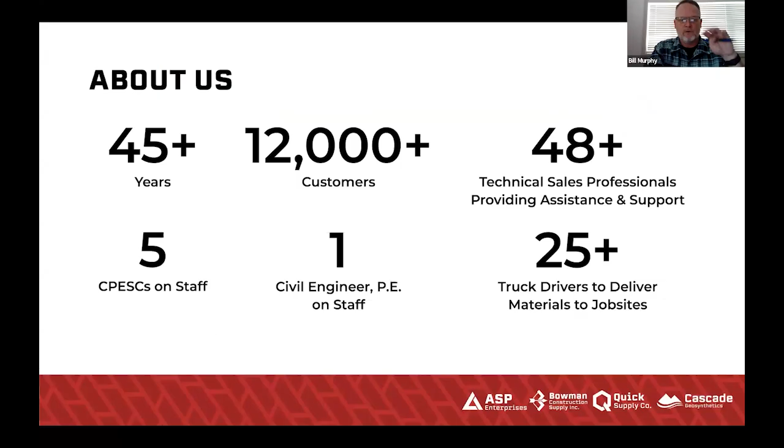This is an old slide. We do have many technical sales professionals, inside and outside sales, and we're blessed with a lot of wonderful warehouse folks and drivers. And we have one engineer, and we ride him like a rented mule - that's me. We've got offices across 12 states, but we work in adjacent states sometimes as needed to help get material where it needs to go.

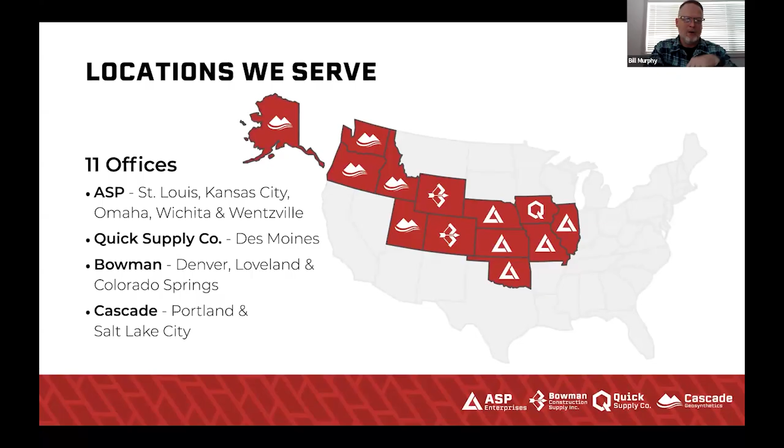For those of you familiar with this, this is all redundant. For those of you who are new to us, you may know us from our erosion control and sediment control or vegetation solutions. We're much more than that. We get involved in a variety of projects, and we're blessed with some wonderful locations.

I get to visit all of them, where we have people who are experts at making things fit inside, outside, and strategically and surgically delivering what you need when you need it. This really matters on some of those big city jobs or tight space jobs where they can't take semi loads of the same product over and over again to offload it. They need exactly what they need the day they need it, and we have people who are very good at that.

I'm blessed to not be part of that. We have people who are experts at logistics. So let us help you.

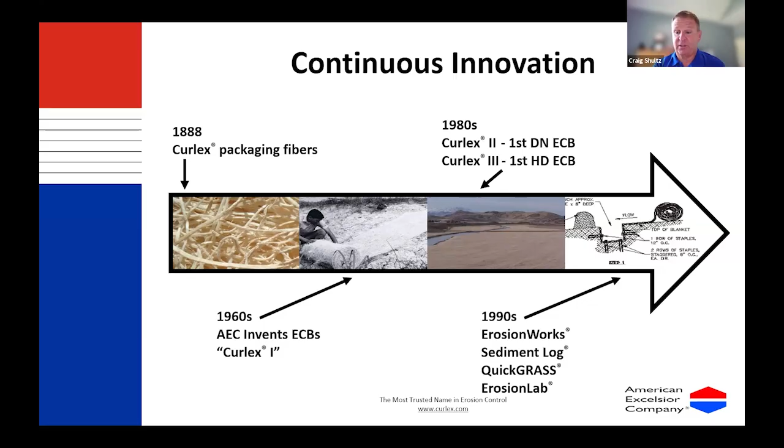In the 2000s, we introduced our Recyclex turf reinforcement mats, a synthetic turf reinforcement mat. We came out with Curlex Net Free, the first netless erosion control blanket and one of only a few on the market today. We came up with the E-Staple and Curlex Bloc. In 2018, we introduced more turf reinforcement mats, and in 2020, our most recent product was our high-vis logs.

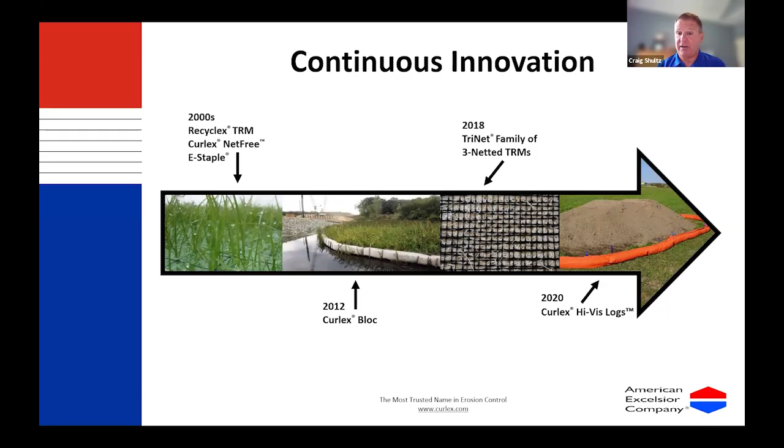That's my office, luckily enough to call my office. Though I live in Lawrence, Kansas, near Kansas City, that facility is in Rice Lake, Wisconsin. The ErosionLab is, to my knowledge, the largest testing lab of its type in North America, and perhaps the world.

At the lab, we do lots of different things, lots of testing, lots of training. We have facilities there that can do ASTM testing, which is a big deal, because without large scale testing especially, it's very hard to compare products. Even with large scale results and index, smaller scale bench results, it's not perfect, but we're trying to get there as an industry to give you, the designers and users, as much information as we can. That doesn't replace real world testing, though.

There are some other real world things, but some of the tests you may have heard of that we do there are D6459, which is rainfall, and D6460, which is channel, and we do all kinds of different things. We prefer to think of it as added value. We want to be a resource for you, your teams, our distributors, so please don't hesitate to reach out to us if we can be of assistance.

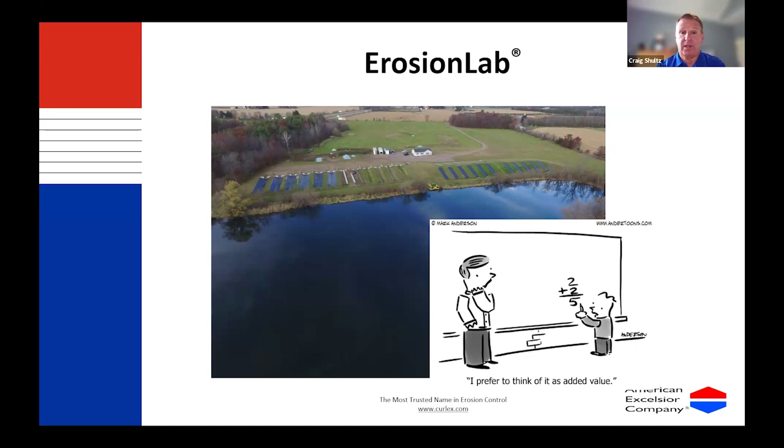I always put a couple of these pictures in so you can understand the size and scope of some of the testing. At the lab, on the left, that's D6460, the full-size version. Those are 80-foot long trapezoidal channels, and we can generate up to 80 cubic feet of water per second down those channels. It's a hugely powerful tool. D6460 in the lab world is just a vertical version of that, with a plywood channel, but it was developed from these sorts of channels, and we're proud that we were part of that many years ago.

What that tells you as a designer or engineer is shear stress, the shear stress capability of a product, whether it's a temporary erosion control product or a turf reinforcement mat. It's important that you know what shear stress means, because most people assume it has to do with when something breaks, but it actually doesn't. What it has to do with is when the test bed, the measured area, loses a half inch of soil on average over that area. The concept behind that, many years ago, was that if you lose that half inch, you're probably losing a significant amount of the seed bed. That's where that came from.

Does it mean the channel completely failed? It does not. Does it mean the material broke? It does not. It's actually not tied to tensile strength. Tensile is not correlated to shear stress.

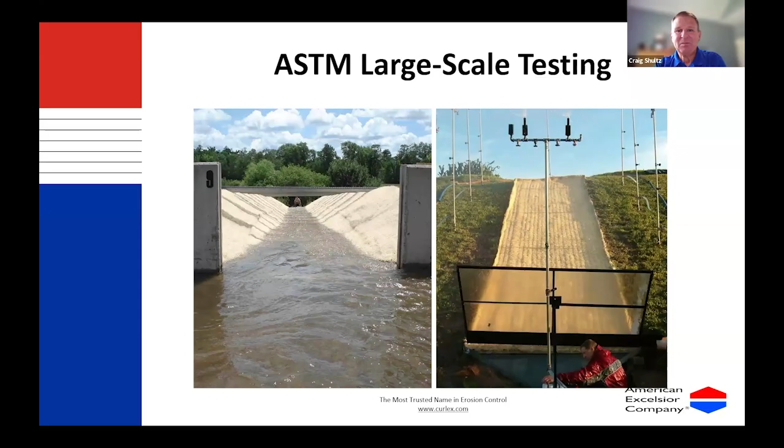I don't go into all of this today because we'd have a 5 hour call and Bill would fall asleep. No, I'm just kidding - Bill would not fall asleep. But we have a great technical support library on our website.

I really encourage you to jump out there and look for it. Please don't recreate something - if you're looking for a spec, a CAD detail, a description, an installation, a cross reference, anything, I promise you we've probably created it. Call us if you can't find it, we will help you find it. We also have a great YouTube channel - you'll see a few videos in here today talking about some things you might find interesting, how things work, some projects and things like that.

And then last, we have the ErosionWorks software that you can sign up for.

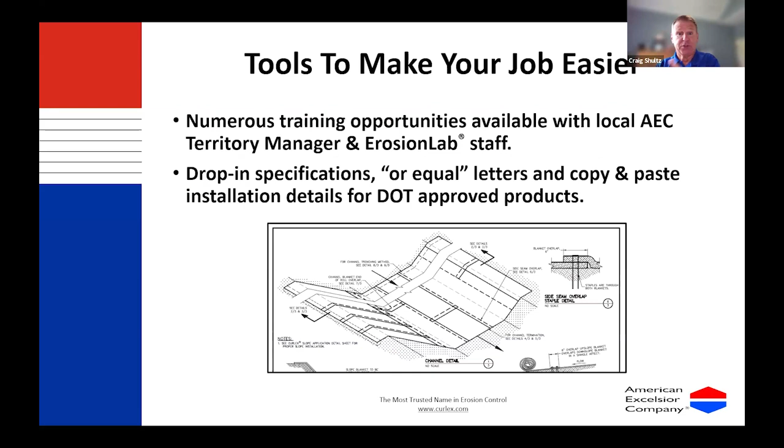Just another example - or equal letters. If you ever have a project and hear the name of a product and want to use something we have, we can tell you what would be an appropriate match, scientifically data driven to give you what you need. Let us know and we can provide that kind of information.

It's very easy to use. You don't need a whole lot of data. You can even do it from your phone. Basically, you have a material estimator.

If you're talking to a contractor or distributor, they might be able to give you some ballpark costs of how much something costs per square foot installed or otherwise. You can enter slope calculations or channel calculations, how steep, how wide, all those things. And it will give you data back out that says, based on what you wanted, an all-natural product or a turf reinforcement mat or something to last a certain number of months, this is what we recommend in a good, better, best situation. You can save a report, gives you great data to use.

Again, not hard to use, but I'm more than happy to have a personal webinar with you to show you how to use it. A nice tool to help you find those things. And also it gives you a DOT approval. So if a product's listed with a DOT, always check with us to make sure that's updated, but it is a nice tool for you.

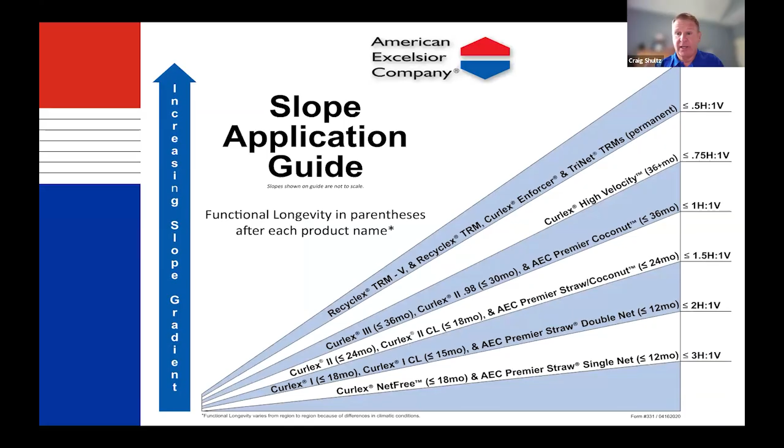Just a couple more examples, slope application guides. This is just some of the quick things people have asked us to do. I'm working on a certain kind of slope, I need something to last a certain amount of time, what should I be looking at? Do I need a turf reinforcement mat? Do I need an Excelsior product? What do I need? And similarly, this chart talks about channels.

Everything in the tannish gray are temporary blankets. These are things that give an unvegetated shear stress, and they're going to last about this long, they're going to take about this much force. And then everything in the bluish purple above are turf reinforcement mats. Those are vegetated conditions, and that's the types of forces they can withstand. So it just gives you an idea.

I think these are fantastic tools. The one before it and this one both, they're just so helpful to have a graphic representation real quick instead of reading through all the documentation for each one. But thank you for sharing these.

Sure. And like I say, all these are out there, just little things here and there to help you along the way. I want to make sure that I don't miss anything here.

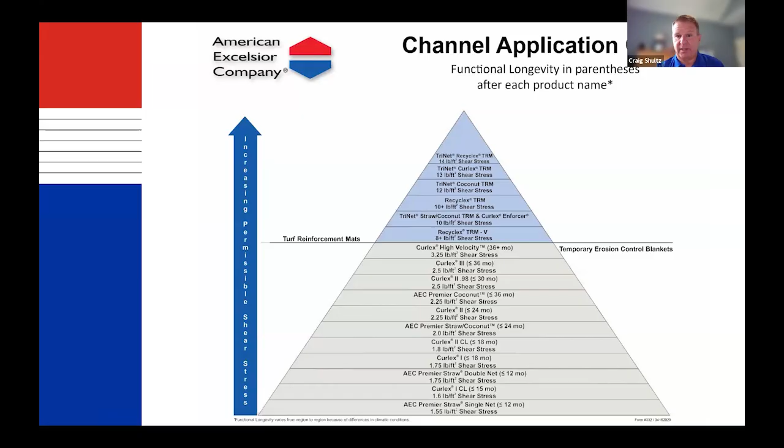So if you're on this call, I bet you know this already, but I don't like to not say it. We talk about erosion control, we talk about sediment control. Obviously erosion control is what we're doing to keep the soil in place in the first place. That's what we're trying to do, we don't want it to go anywhere. And usually in our world, that tends to be because of water. It can be wind and stuff too, of course, but water is primarily our concern.

Sediment control, on the other hand, is when that sediment is broken away from where it was. We're trying to stop it from leaving the site, entering an inlet, whatever it is, that's what we're trying to do. And as much erosion control as we can do, the less we have the need for sediment control. But in the real world, we all know that there are times on projects where there is land disturbance, and the opportunity to do erosion control is very minimal. It just doesn't exist. We have to do sediment control in certain conditions. So it's a balance, we're trying to do the right things.

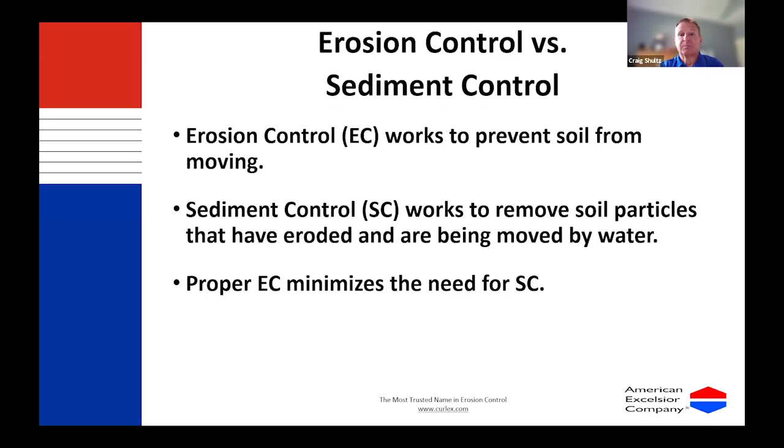Oops, I didn't click right, sorry. I'm not going to read this, but if you Google our new normal, there are hundreds, if not thousands, of facts like this that talk about what we now, and you on this call, have to design to build to, deal with in your world.

Companies like Bill's, their job is to help provide you all those different best management practices and those solutions for the events that are possible. If it fails, is it just inconvenient? Maybe. If it fails, is there concern about loss of life or danger? Well, that's a different deal. And are we designing for a 10-year event or a 100-year event?

What we see on average, and I'm sure Bill's team probably does too, the calls we get over the last few years are more erring on the side of caution than they are on the side of 'well, I don't think it'll be a problem.' The 100-year events get brought up way more than they used to be at the beginning of my career. And so we know that because of things like this, those concerns are going into protecting our environment and protecting our people.

Nobody likes this, you never have a red dollar sign. That's a good thing in any report. This was just a stat I pulled. I've had a couple people say, well, it's only $5 million in the scheme of 5 years, that's not a lot. I think $5 million is a lot of money.

What this doesn't show is all the shutdowns, right? It doesn't show all the cleanup costs. It doesn't show all the penalties, all those other things that weren't fined by the EPA. And as you all probably know, that can be significant.

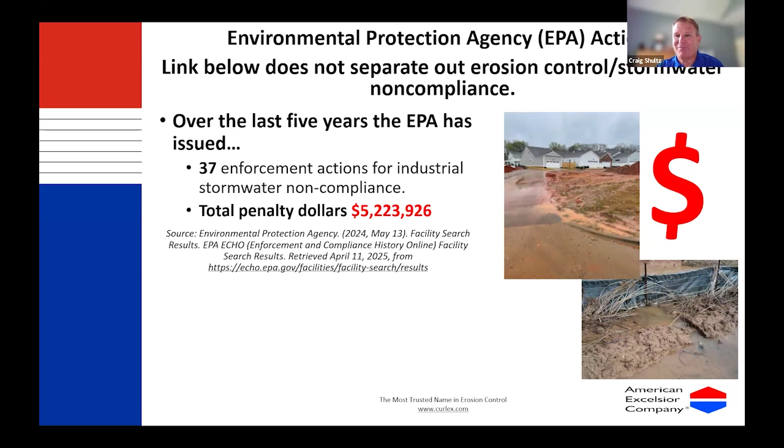We want to do these things because it's the right thing to do, but we also don't want to cost ourselves or our clients more money. So it's important to note. I don't think it's probably something I have to push to this group.

Okay, so I want to talk a little bit about products, just to give you some ideas of differentiators and things out there on the market. We have a line of turf reinforcement mats, 3 different types that use the Recyclex products. If you have the need for a turf reinforcement mat that is fully synthetic, I like to point out some differences. A lot of turf reinforcement mats on the market today have a specific gravity of less than 1.

The short version of this is if it's less than 1, it floats. If it's more than 1, it sinks. We would like you to consider that the Recyclex type products out there don't float, and they have some nice characteristics, some recycled content, and some other things that we think make sense.

Usually the next question I get about turf reinforcement mats has to do with plastics, and usually that's for one of 2 different reasons. I'll first talk about animal entrapment. We don't see a lot of animal entrapment in TRMs because the nettings tend to be heavier, not super thin like they are on temporary blankets.

But just so you know, many turf reinforcement mats can be soil filled. That means instead of planting the seed and soil amendments down below the material and having it grow up through the TRM, in many instances you can do a thin fill layer over the top of the TRM and have the vegetation grow down through.

Oftentimes that meets some requirements of more sensitive areas that need a turf reinforcement mat for performance, but don't want to have the plastic exposed. Just something to keep in mind. We don't need to go into all the details of that, but I think that's pretty important.

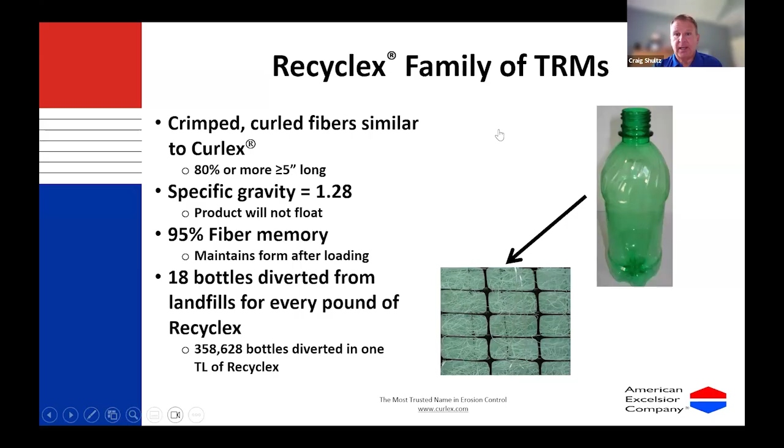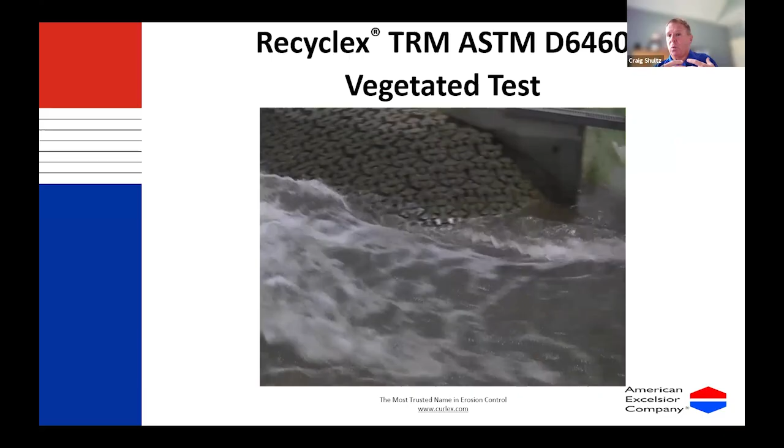Why does all of this matter? So we have a video, and this video talks about the type. This is done at our ErosionLab, and this is an actual test. We have 2 big diesel-driven pumps, we can generate 80 cubic feet a second. We get asked all the time how long does this product last? This material was installed 25 years ago.

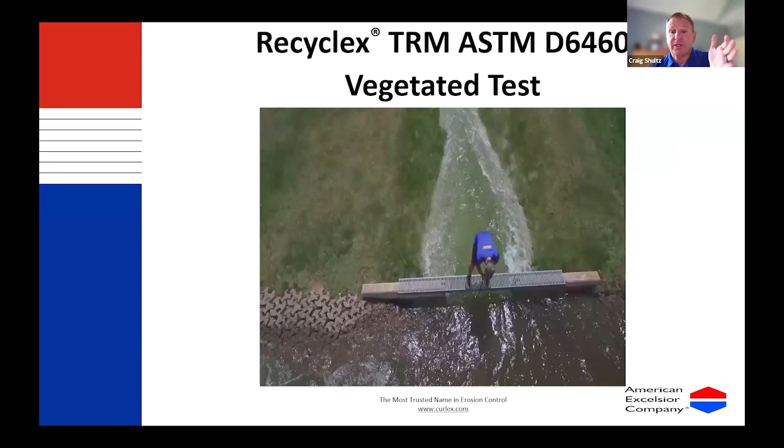The video is showing this TRM, Recyclex TRM, could withstand about 10 pounds of vegetated shear. As much water as you see flowing down there, that's not even quite 10 pounds of vegetated shear. And that video, that's about 8 pounds, so it can withstand even more.

So that is the type of environment, a well-installed, as with any best management practice, a well and properly installed product that's well vegetated. That's the type of solution you can get from a turf reinforcement mat. It can often replace other more expensive solutions like hard armor.

That does not mean you wouldn't use hard armor, or flexible concretes, turf, or riprap in certain instances. They all have benefits, but we do find there are many opportunities to do vegetated solutions and gather those benefits using a turf reinforcement mat. So it's just something I like to share.

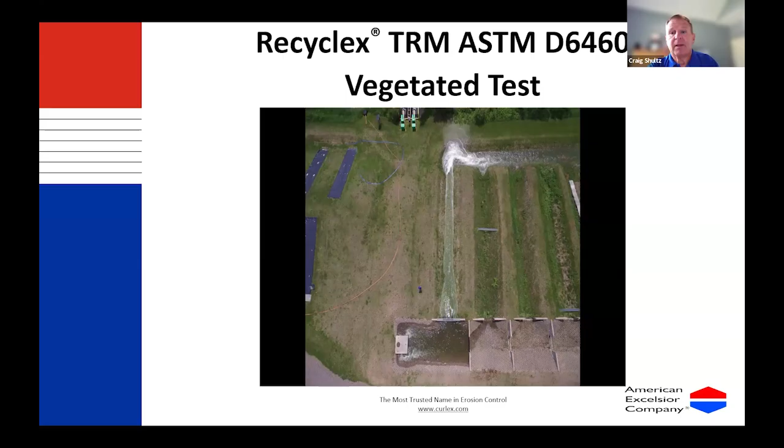This video is an older video as well, this was back in 2012. This is our lightest product, it was designed to withstand 8 pounds of shear.

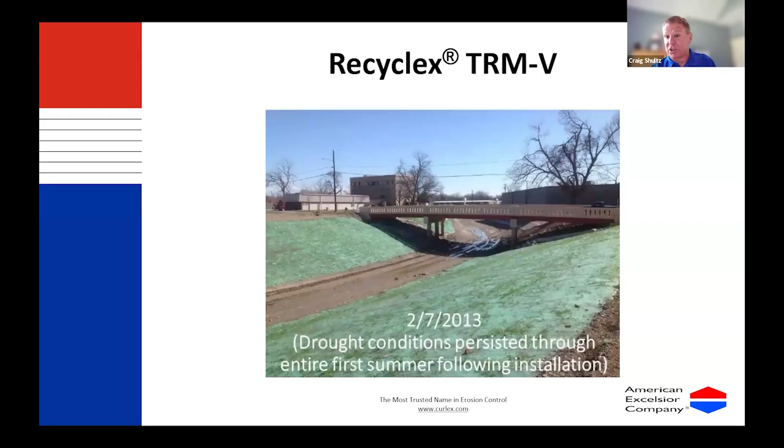The point of this is that, at the bottom of this channel, just so you know, before this event, that bottom section was concreted. They did use concrete in the bottom of this channel because it would always have some water. They were afraid they wouldn't get good vegetation establishment.

So this happened about 2 years after install. And I'm not an engineer, Bill may be able to tell me, but I don't know how much shear stress that is, but I promise you it's more than 8 pounds.

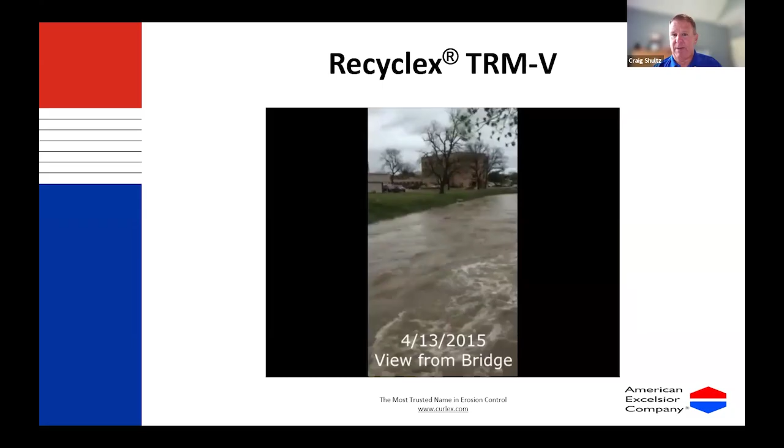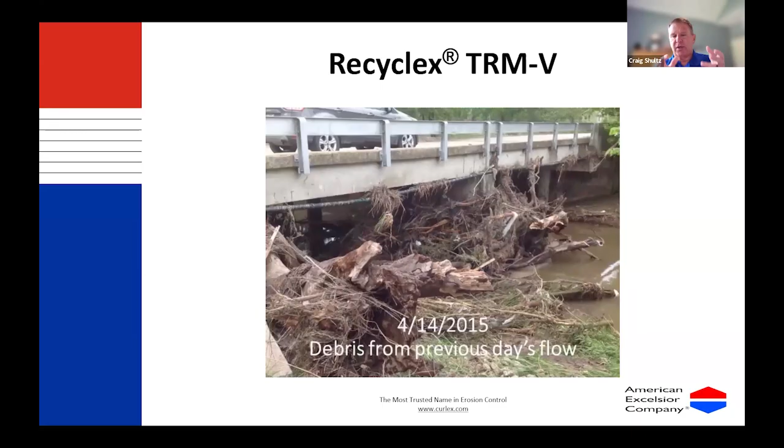That's what I get to before when I say it's tested to 8 pounds or so, but often that's not the whole story. So it would withstand these huge pieces of debris and these huge flows and still be in good condition. That's right after the flow when it receded. One of the more important things about this video is 2 days after the initial flood, this happened.

So I'm fairly certain it's super saturated soils. There's no more. One of the great things about vegetated channels is they filter the runoff and allow it to incorporate the water. Well, it's not going to incorporate anymore. So the products are under much more stress in these conditions because there's nowhere for the water to go.

They can withstand these sorts of forces, properly installed, properly spec'd. But this is what that channel looks like most of the time in Texas. So again, just another example of a best management practice that maybe you haven't considered, that is most likely going to be used with other best management practices and solutions that Bill and his team can provide.

Touching on just one more turf reinforcement mat. We have a wide variety of turf reinforcement mats, I don't talk about it. You may hear the term biocomposite turf reinforcement mats versus fully synthetic. Curlex Enforcer was our first one of those. It's been around for many years.

It's designed with our natural fibers in the middle and the permanent nets—we like to say long term, but permanent nets—on the outside of the material. So you'll see specifications like this across the top, designed for 1/2 to 1 slopes, up to 10 pounds of vegetated shear and velocities of 17 feet per second.

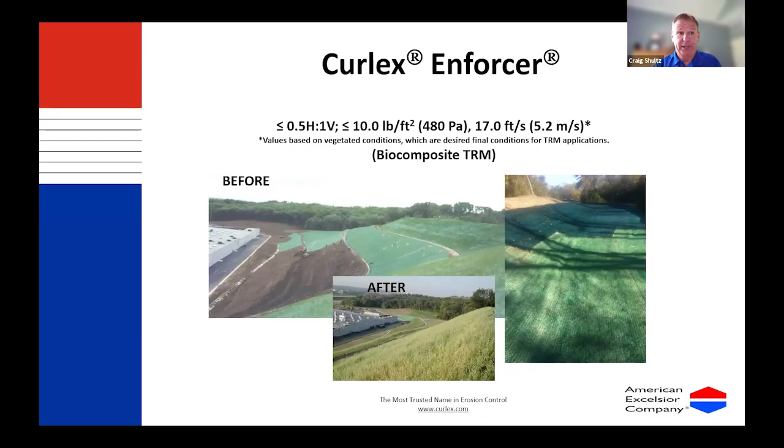So now I want to talk about Curlex fibers, the thing that most people know us for. Bill, are we doing okay on time?

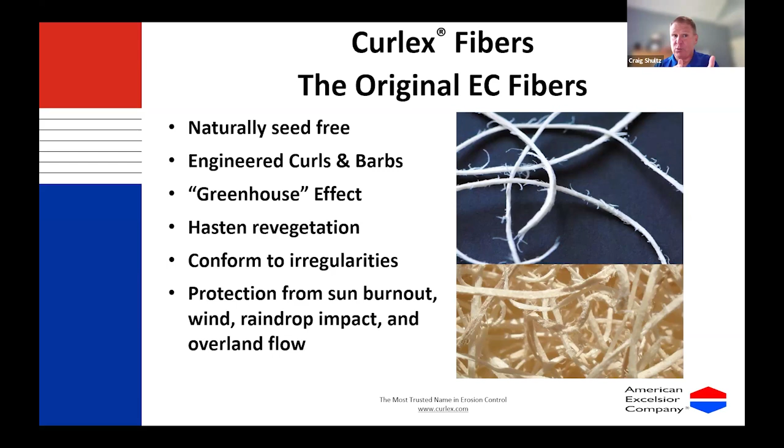Where do they come from? Well, not just one tree, but a whole lot of trees like that. So Great Lakes aspen are the trees we use. As I said, our facilities are in Rice Lake, Wisconsin, Northwest Wisconsin. As you may have guessed, a lot of Great Lakes aspen are up in that part of the country.

Great Lakes aspen is generally considered to be one of the softest hardwoods. The other great thing about aspen is it's very sustainable. When an aspen is cut down or blown over, it sends out little runners and self-propagates. They have no pitch or resin.

So you'll see other pines and things like that. Those naturally contain pitch or resins. So the aspen has these really great characteristics that make them a very clean, very consistent fiber and very sustainable.

The largest living organism that I know of in North America is a stand of aspen trees in the Western US. They're all connected, right? It's this great living organism, self-propagating, and really important at various life cycles of elk and other animals who use or live in that environment.

Just something important to note: we do not use any chemicals. There's no heat drying. They dry naturally outside for 12 to 18 months. The bark falls off of them basically about half the year - it's what's called sap peel. The other times when it's still on there a little bit, we use a very basic mechanical cleaning to remove the bark, but there's no chemicals used in the preparation of those fibers.

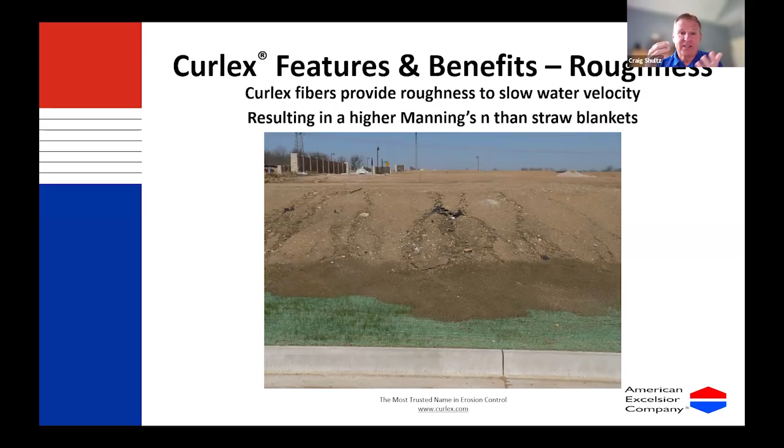What that roughness and growth also does is grab a hold of the soil and grab a hold of each other, making it a very durable product. So it's a nice added benefit of using Curlex fibers.

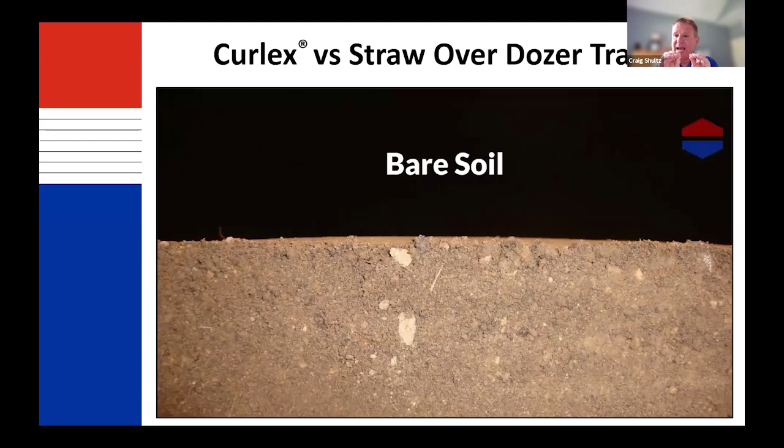This is a simulation over some dozer tracks. Both of these products in this video are made by our company. Again, I'm not trying to say you never use straw - we use straw in a lot of places, and it can be a great solution. But I just want to show what happens when water hits them and how it expands to fill in the voids.

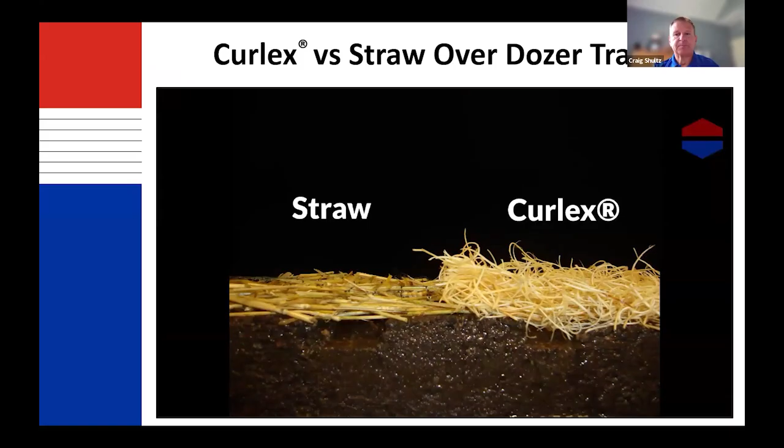I told Bill I have some music on these, but I turn it down. I could sing - Bill had better music at the beginning. I probably should have used some of Bill's music.

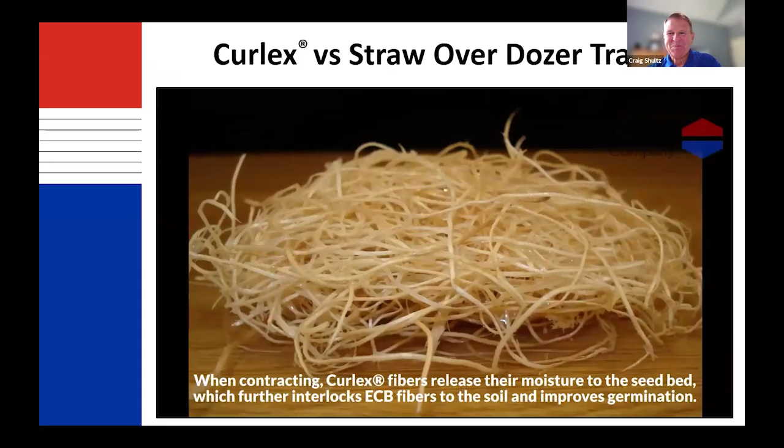But that is what they really do. I mean, you can grab a sample of our products and spray it with a mister, and they do expand - that's exactly what they do, grabbing a hold of soil and grabbing a hold of each other. I don't talk about this in this presentation, but I do want to touch on why that also matters in other applications.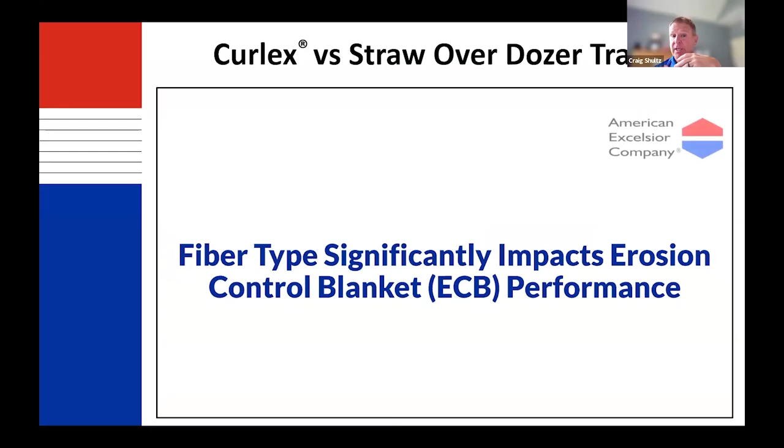So, oops, I was trying to restart on me, wasn't it? Before we get into the products - oops, I'm going too fast, Bill.

There we go. One of the things in erosion control blankets I'd like to touch on: most temporary erosion control blankets are made at half a pound per square yard. That's their mass per unit area - a very common number used in our industry. That's not by accident; we've learned over the years that's about the sweet spot, giving protection without choking out vegetation.

Well, one of the really interesting things about Curlex is we make products with up to 1.62 pounds per square yard. There's several reasons you should find that important. One, you might ask how you can put more than three times the amount of mass and still get good vegetation. Well, it's that video you just saw - it expands, so vegetation can get through it.

The other thing you might not have considered is that, generally speaking, coconut blankets are believed to last longer, and that is an absolute fact - coconut fiber will last longer than most other natural fibers. But when you can put more mass of something like Curlex, you can start to reach the functional longevity - the term most people use - of a coconut blanket with a domestic product. So I just want to keep that in mind. Again, this is not to bash on coconut.

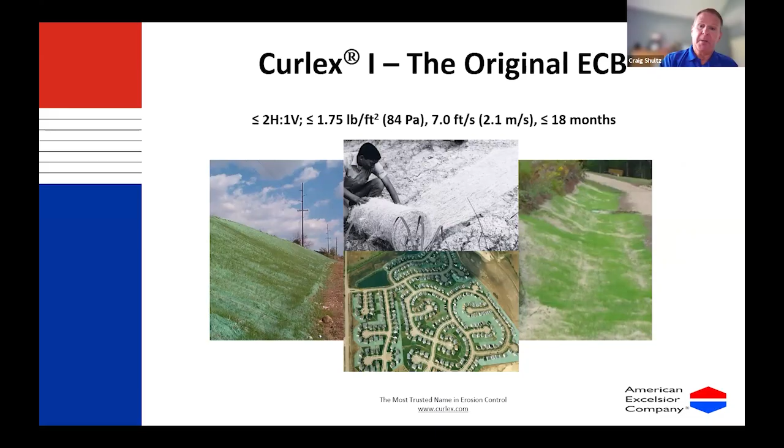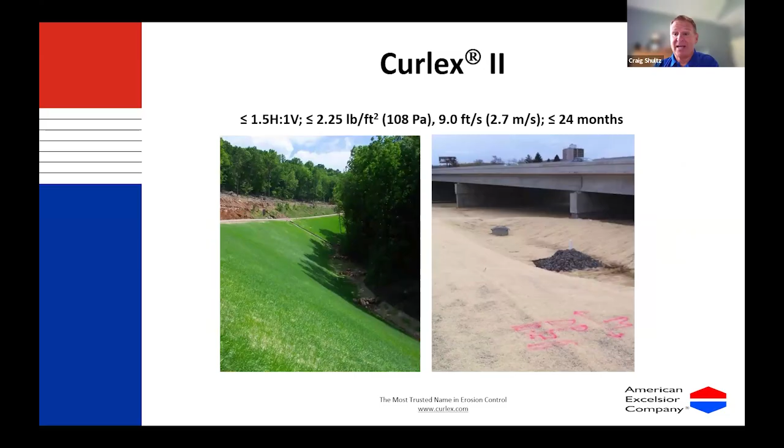They can be pigmented green just for aesthetics if someone is interested. Curlex 2, so 2 nets, right? And again, a little steeper slopes, a little more velocity, a little more shear stress, a little more durability. Again, we're just working our way up. I don't show all the versions of this, but we make one that's got Curlex 2 that has even more mass, so a higher functional longevity and so forth.

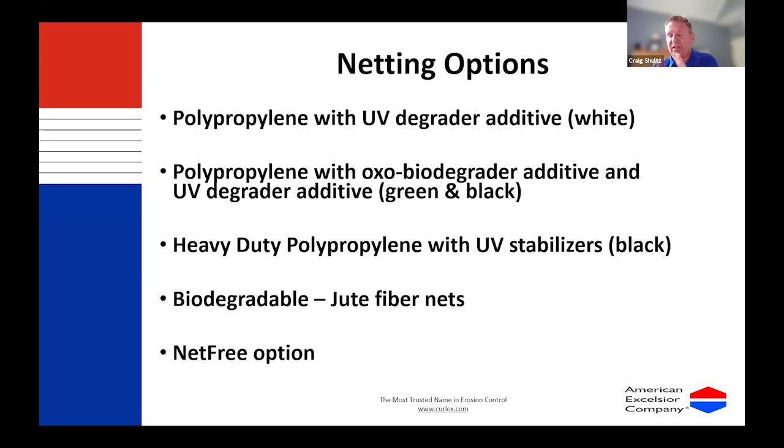Netting. So netting could be a whole conversation. In general, most manufacturers do similar things that we do. We have a polypropylene net with a UV degrader additive, we call it Quick Mo. It's designed to break down very fast from UV degradation. We also have polypropylenes with OXO, so oxygen degradation and UV degradation, that's either green or black. So that's on a lot of our temporary products. We have the more heavy duty polypropylenes that have stabilizers in them, those are for your turf reinforcement mats. They're designed to not break down. And then we have our biodegradable jute nets, which we'll talk about next, and of course the net-free option. All of our products pretty much across the board are available with these nets. Obviously the TRMs have a set net, those don't change.

One of the things we are proud of with Curlex products, we are able, when we use a plastic net, to use less plastic because of those characteristics, those long fibers that intertwine. We are able to use plastic netting with bigger openings, 1 inch by 2 inch. Our other products, straw and coconut, like most manufacturers, use approximately a 1/2 inch by 1/2 inch opening. So we can put less plastic on the ground because the fibers stick together on their own a little better. We don't have to hold them in place with a tighter netting. So that's a nice thing if you do need to use plastic.

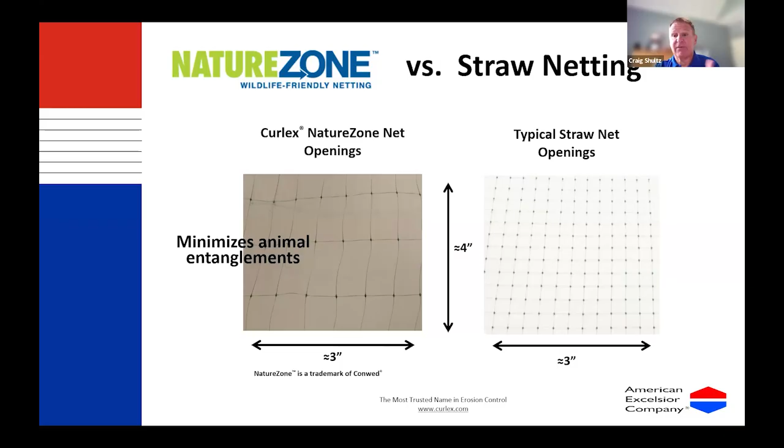As I mentioned, FibreNet, that's our brand of jute netting. You may have heard the term leno weave in the past, it just means how those little strands are woven together. A lot of people assume that jute netting is weaker than plastic, and that's actually not true. There may be different degradation rates, but jute netting is actually quite strong, and it can be quite durable in many conditions. What's nice about this is, A, it's natural, there's no plastics, and B, if you need to spread apart the fibers you can, or if a critter gets in there, there's no fixed joints. Those things just pull apart, right? When they're on the ground, they're holding the net down, but they can move. Those joints are made to be woven, not fixed.

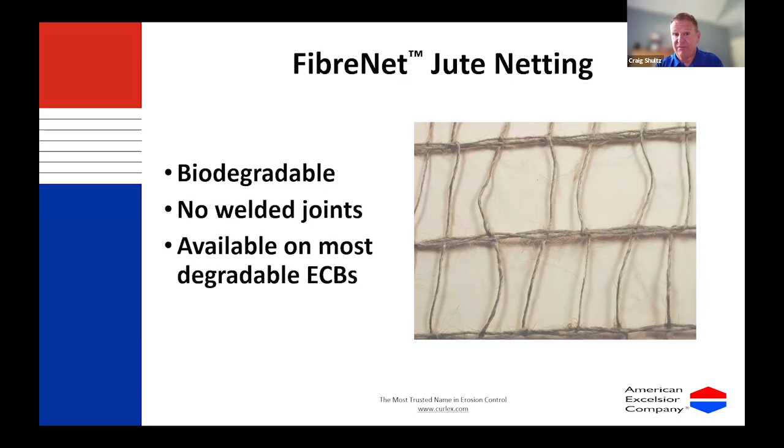One nice thing installers and project managers really like about all Curlex blankets is that at the beginning of every roll, we have a red painted line. There's an arrow on the package, and the installer can stand behind it, take that red line, fold it back, and push the blanket away. What's also different is right before the end, about 10 feet before it, there's another red line. The installer sees that, and they can walk to their side, grab it, and unfold it like a bed sheet.

This may not sound like a big deal if you're only doing one or two rolls, but over the course of a project, the ends of other types of products are often thrown away. They're really hard to unroll - I call them a cigar end - they get crunched together and are harder to unroll. You don't have that problem with Curlex blankets because of this characteristic. It's a nice adder, and it lowers the cost of a product if you can get more coverage out of it.

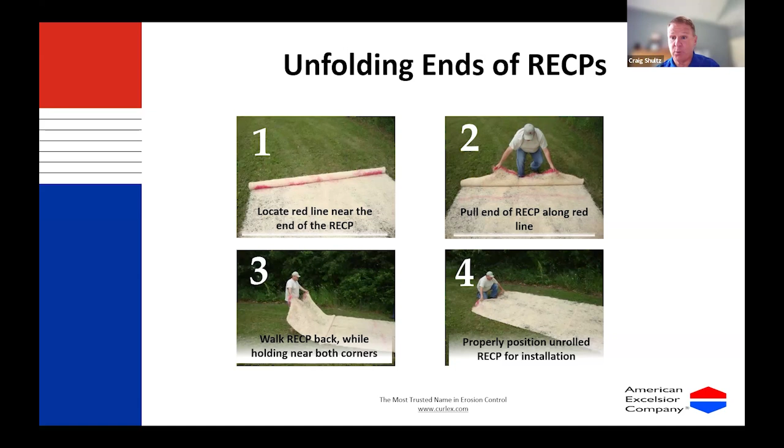It does. And it also means contractors might be more likely to ask for it. Even if it's not specified on the plan, they might still ask for it because they like it better based on their history with it. So that makes a difference. Sometimes the engineer just specifies ECB or a certain class, but the contractor gets to know which ones they like better.

For sure. And we won't get into this today, but Bill and his team also optimize truckload quantities. Bill and his team know this with some of our products, our CLs and our half-pound products - we can actually really optimize a trailer full and get more square footage on than most other products. It varies, and I won't bore you with all the details, but those things add up, especially when you're talking a full semi load or more.

We're all looking for ways, right? We're all paying more for labor. We're all trying to find labor, for goodness sakes, at all levels. So all those things add up.

Bill, do you want to talk about this before I jump into this quarry thing, since your team's so instrumental in it? Just a little bit. We've really been talking about this a lot this year and last year because we've had such wild success.

This picture is taken from near Interstate 25 in Colorado, south of Denver and north of Colorado Springs, very near the U.S. Air Force Academy. This was a rock quarry where they pulled out limestone that helped build a lot of the infrastructure in the Colorado Springs area for decades. When the quarry was no longer active, the owner moved on to other projects, and the city of Colorado Springs and area residents complained about the look - they gave it a dirty nickname called 'the Scar,' which we're not supposed to say anymore. It had bad press for a long time. The city and some environmental people said we have to do better, make it look better because it's the entrance to Colorado Springs coming down from Denver from the north. But they also wanted it to be better for wildlife and recreation.

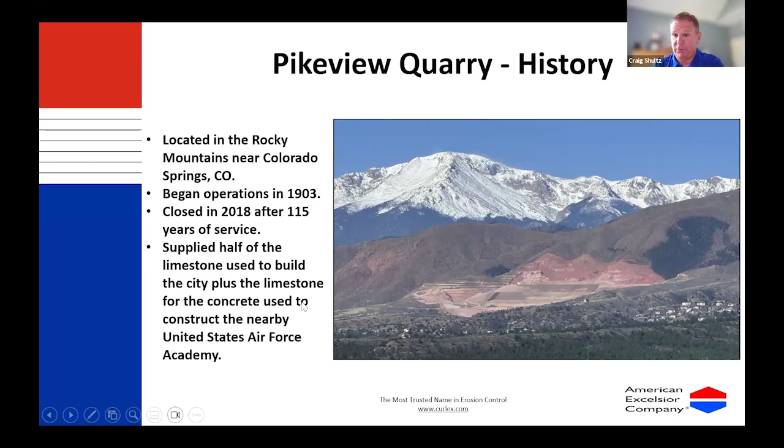So Bill already touched on this. It's located near the Rocky Mountains, near Colorado Springs. It began in 1903, closed after about 115 years. If you look at this picture, the Air Force Academy is to the right a few miles, and Colorado Springs is to the left a few miles. A huge, huge thing - the stat I saw was half the limestone to build the city, and the limestone for the concrete to construct the Air Force Academy. It's a massive, massive facility.

So in the scope, these are scopes that probably aren't foreign to any project you guys have worked on - revegetating, stabilizing, that's the top priority. But how do they do it? There's 150 acres and really steep slopes. I don't know if any of you have ever worked on a 2-to-1 slope that was 300 feet long, but I promise you, when you walk up about half of one of those, unless you're someone who just loves that stuff, you're tired. It's unbelievably steep. And not only after reshaping, they're in an environment that seems to be feast or famine - it's drought, or it's pouring down rain, or it's drought, or it's snow. It's really crazy out there, and there's a lot of highly erodible soils.

So they did have to combine several best management practices to provide a solution. Some of the original attempts used straw blankets. Again, I'm not bashing on straw - it just wasn't made for this sort of environment. It was not made for this severe of a project. It's great for a lot of projects, it just wasn't the right solution here.

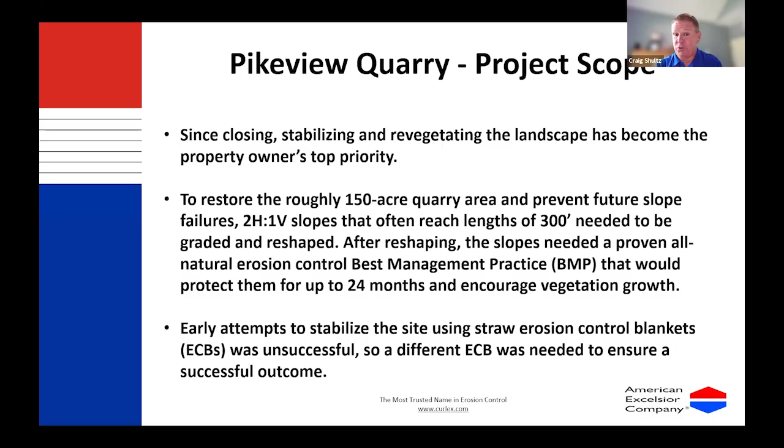So now they did a lot of other things, as Bill mentioned. Other manufacturers came out, there were topsoil considerations, soil amendments used. I think they spent quite a bit of time getting down to the right seed mixes. As we all know, on any project, but especially one like this, you've got to have a good seed person. And your seed person knows you've got to have something that pops pretty quick in the environment you're in, but you've also got to have things that deep root as quickly as possible. And you've got to have a blanket, in this example their BMP, that's going to hold up for more than a few months, because not all of it's probably going to be established by the first big weather change. So that's a really big deal.

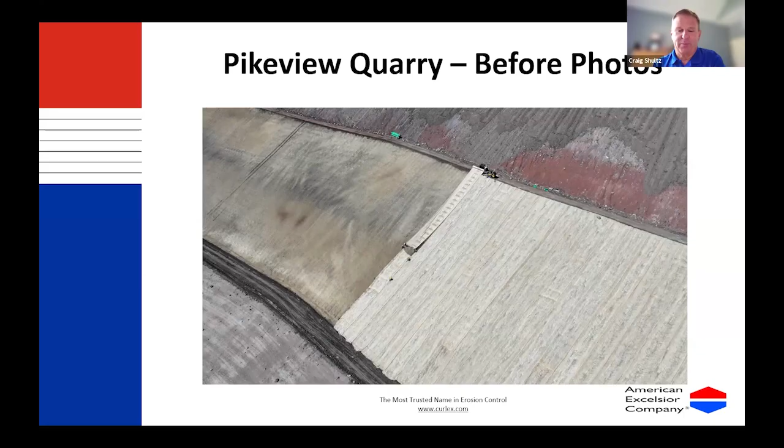So this is one of the slopes. We drove up on one of those roads, and I like to say I'm glad everybody trusted the gentleman driving the truck, because he was doing a 17-point turn to turn around on the road. As I was looking down the side, I told him I'd walk - it's very steep. So there's just some before pictures, some drone pictures. We've got a video at the end we'll show you.

Bill, jump in if I'm wrong - the top slope there, the very very top, has been shaped. The next slope down, they were doing topsoil. Then the third slope down, where you see the lighter color on the right, that's the Curlex 2 fiber nets. To the left, that had been sprayed with a soil amendment and seed, correct?

Yeah, and I want people to see how tiny the people are down there on the slope with the Curlex, with a truck up top. I don't know if you can see my cursor - that's a dot, that's the truck we're looking at. That's massive. Right, right.

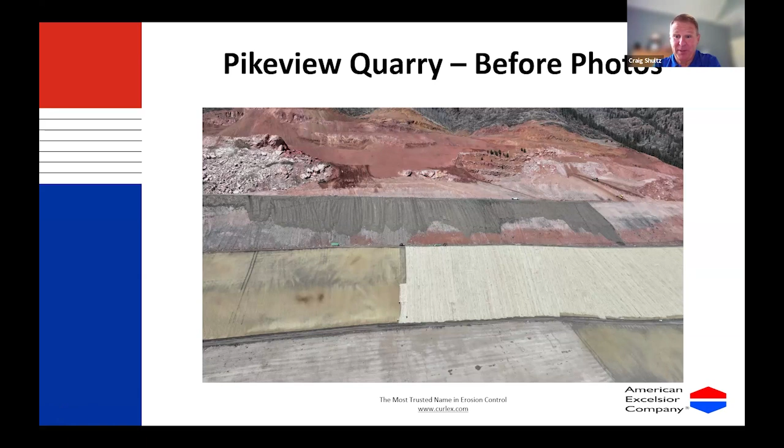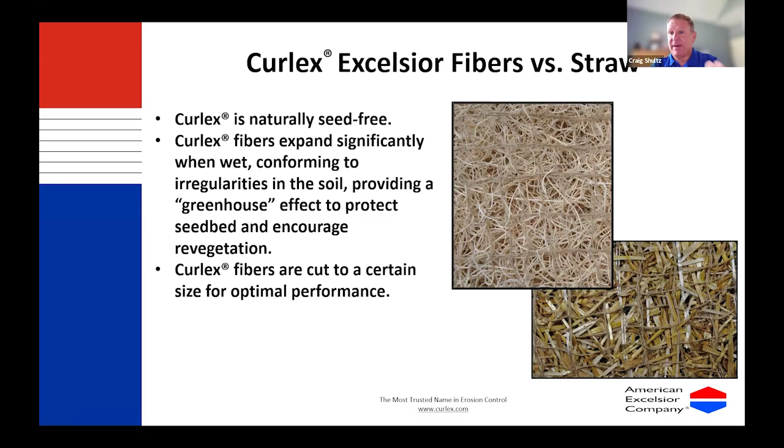There you go. So I've talked about this at the beginning, so there's not a whole lot to cover here. But as I mentioned, it's naturally seed free. We talked about the expansion and contraction - Bill and I got ahead of ourselves there trying to change the order of our presentation. But all of those things we've already talked about really gave the performance needed to meet that.

So this is a video that we shot not too long after the project was installed.

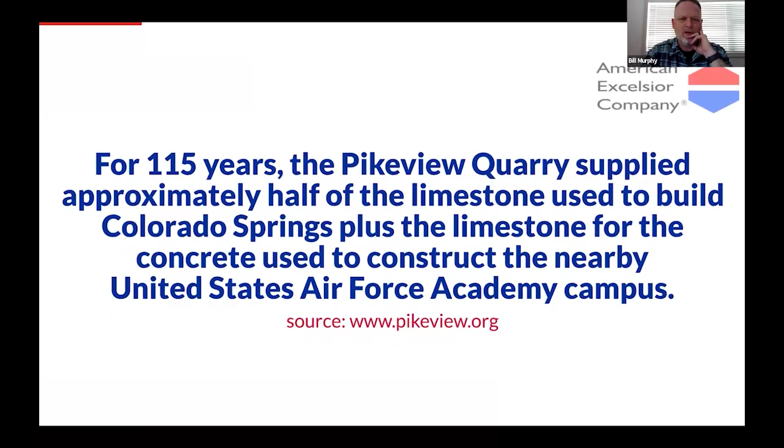Craig, are you seeing it now? I have myself muted, this is going on my side. Yeah, you're muted too if you want to narrate it. Yeah, I'd close it there for a minute. I know we have a little bit of a glitch here, a little time delay.

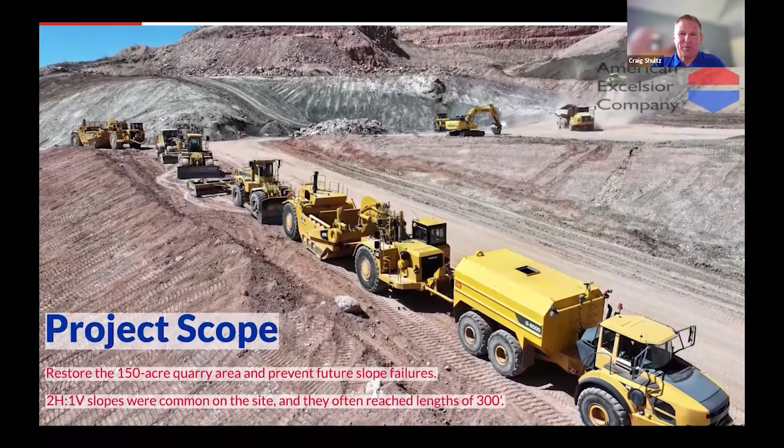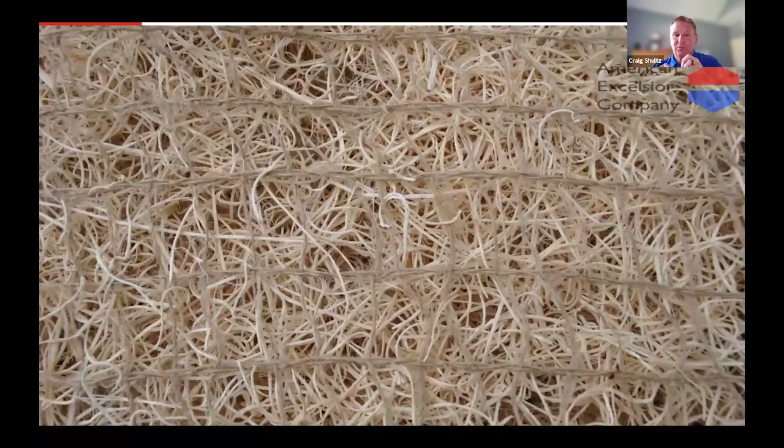These were just Bill and his team and some others who helped us get some great photos. You just see the scope of it - I mean, these are really steep, really long slopes. We've talked about this at length already, but grading them, reshaping them, putting them into these sort of... let's say, how do you eat a 500-pound elephant, one bite at a time.

Elephant, yeah, whatever—one bite at a time. That's really the product they used.

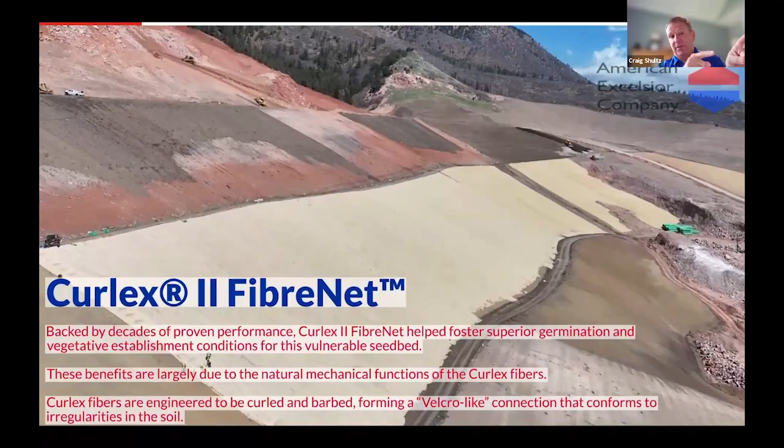So this is a drone shot, from that other picture we showed you before, putting your topsoil up there to the left, putting this down. There were rock outcrops there just to the left of those green rolls. That was a rock outcrop—there was nothing they could do about it.

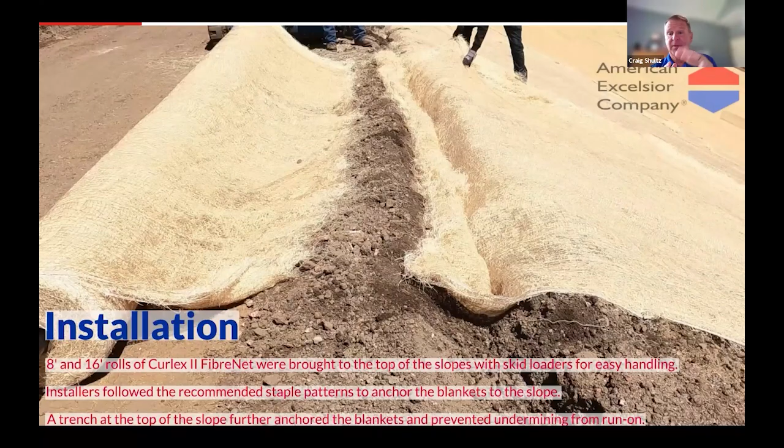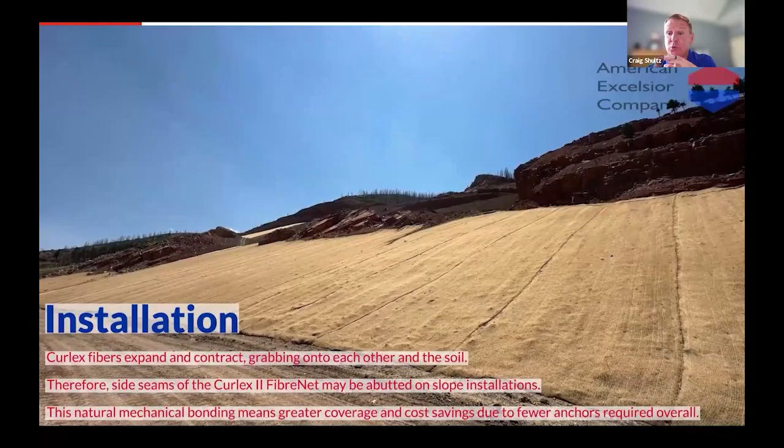This picture shows installation. They trenched the top. We could talk for a long time about proper installation, but the thing I'll tell you about any erosion control blanket is if you're putting it on a slope and you can't go more than 3 feet over the crest, you got to trench it. You have to—it's not hard, and it changes everything.

The other great thing about Curlex blankets—in that picture you might notice they're abutted, not overlapped. Curlex, because of the way those fibers act, you do not have to overlap seams on slopes. On channels, you do.

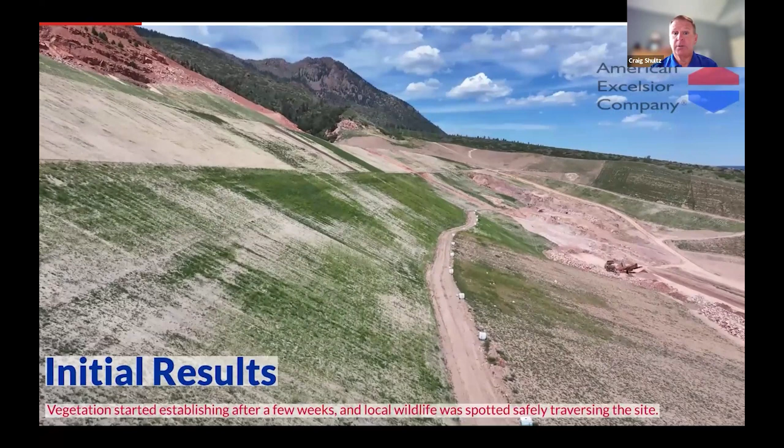So this is some initial germination, and they were really happy with it. We've got pictures from a long ways away of these pronghorns walking through it. It's very grainy, but they were happy because they saw wildlife out there on the project.

Stantec just did a video on LinkedIn, also on YouTube, where they talked about the insects and smaller animals that are all returning to that slope now. They just did it recently, so they're thrilled.

Yeah, it's the whole thing, right? It's the whole thing. How are we doing on time, Bill? We're right at 121, we got 9 minutes left. Okay, be really quick here.

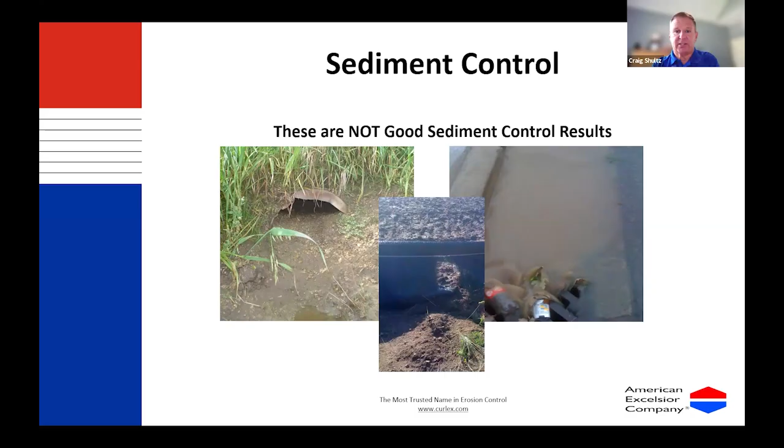I did want to just touch on sediment control products. Obviously this isn't what we want—we don't want trash and soil. We make sediment logs. You may have seen other cylindrical products on the market, straw wattles, and all the other different kinds of socks and logs.

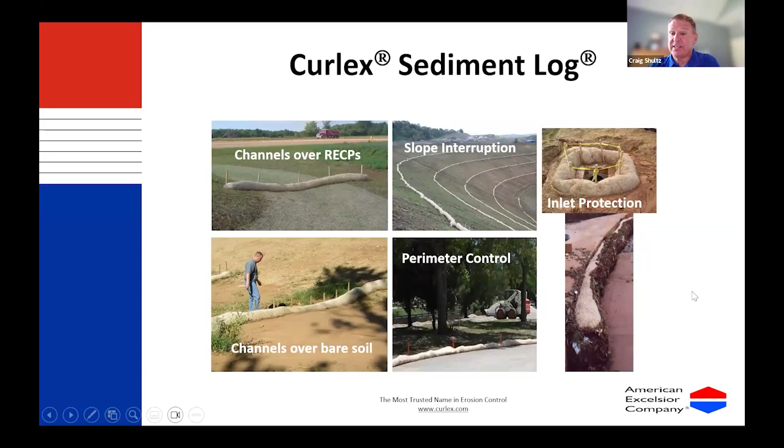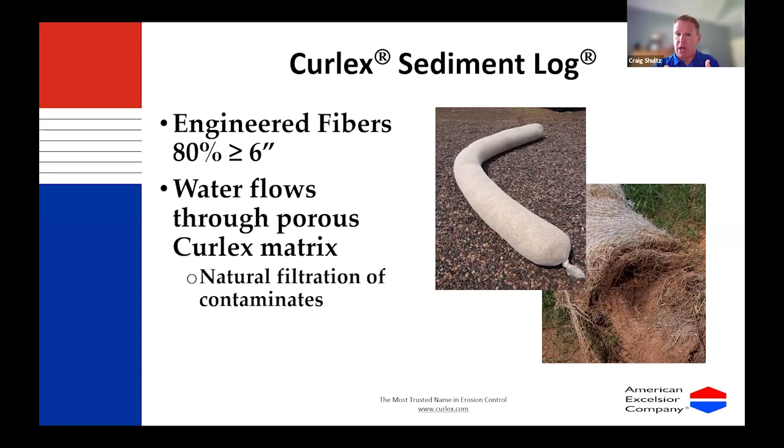The big thing I want to point out about a sediment log is while it's often considered in some of the same categories, they're designed to work differently. Our logs allow water to flow through the matrix at more than 35 gallons per minute. The idea is we want to dam it less—we want the water to flow through and capture sediment on the inside. What we see in the field is it lowers hydrostatic pressure, fewer blowouts. They can have a poly wrap or a natural wrap, just something else to consider.

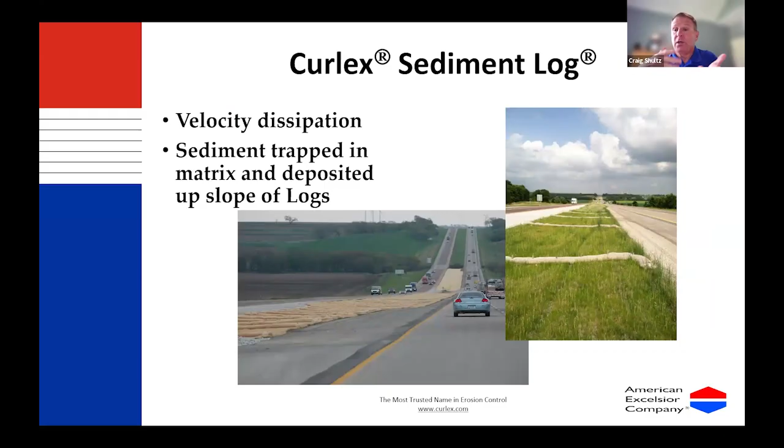There are many applications, and the point of this picture is this: if you get too much ponding or sediment buildup behind a sediment control device, you obviously don't have vegetation there. What we see in the field is these sediment logs allow that sediment-laden water to flow through—again, fewer blowouts, less piling up of sediment. It's just something to consider.

If you're not sure whether you need a damming device or a filtering device, I'm sure Bill and his team can offer both, and you might just try how they work in different applications—does this work better in this environment or in this application? And that's okay.

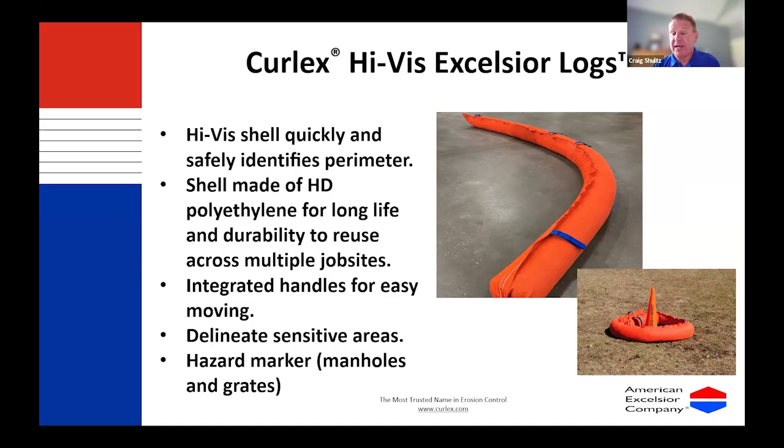High-vis Excelsior logs—we got calls about needing something more durable, something we can move around. So we took the Curlex fibers and used a more permanent, durable shell. They come in like 5, 10, and 17-foot lengths.

Lots of different applications, but sometimes we see areas where they have hard surfaces and want to mark off certain areas, so they want to stack them. We had a customer stack 3 of these up and zip tie them together, or put stakes on the outside so they have a nice heavy mass on the ground.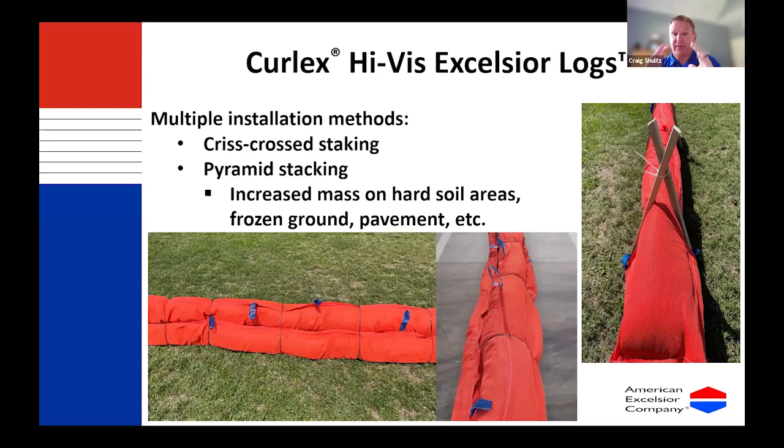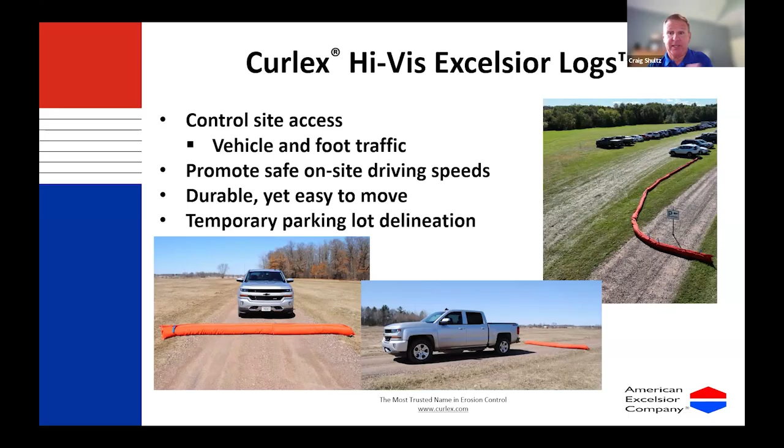One of the ways we use them at the ErosionLab—it's a huge facility, we host big events out there—we actually use them for traffic control. So if you've got outdoor events where they need to do traffic control and have a plan for any rain and sediment, these might be a nice solution for you. Just something to keep in mind.

That's a good creative idea, and the bright orange color looks perfect for fall, for October, for all your corn mazes—we should put pumpkins on them. There you go.

I show this video just to show the difference between damming and filtering. So again, when you pour water over this wattle, it goes around the outside, right? It's meant to dam the water—that's exactly what it's designed to do.

It is neither good nor bad, it is just how they work. But when you pour water over the sediment log, watch how the water goes through it, because we're slowing down the water, capturing contaminants, reducing velocity, and filtering it.

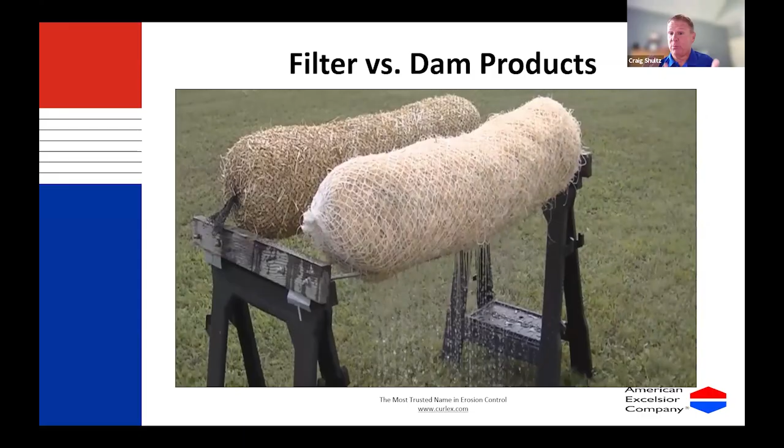It's another way to skin the cat. You're going to see pros and cons. I don't know if you'll see cons to any of them, but you might find some work better in certain applications. We're seeing them used in perimeter control, inlet protection, grate protection, all kinds of different things made with the same fibers. Another cool thing about Great Lakes aspen is it is listed or recognized by the EPA as a sorbent, so it will remove hydrocarbons from the water. A nice added benefit, lots of different applications as I've said.

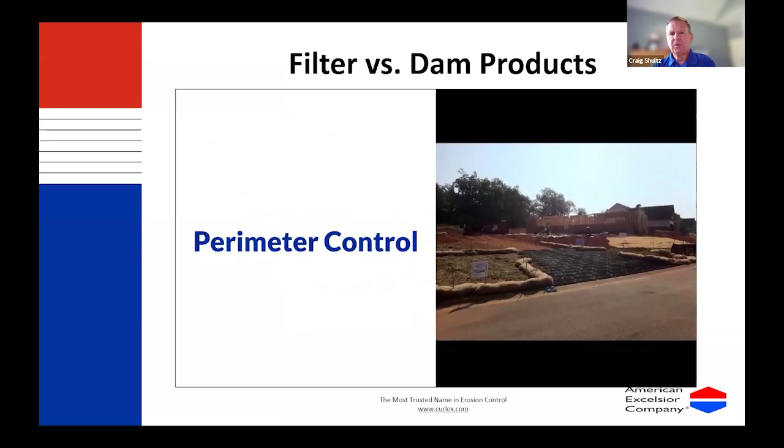I'm going to skip past this because I know we're running on time. But again, sometimes it's over bare soil, sometimes it's in finished areas, sometimes it's perimeter control—lots of applications you could think of.

I do also want to touch on Curlex Blocs. Imagine a dimension like a bale of hay or straw, but longer. Standard ones come in a cotton form. These were originally built as an American-made alternative to coir logs. People are looking for dense, fairly dense, but heavy products. Well, these actually still flow very well—not quite as much as a sediment log, but they still flow and filter really well.

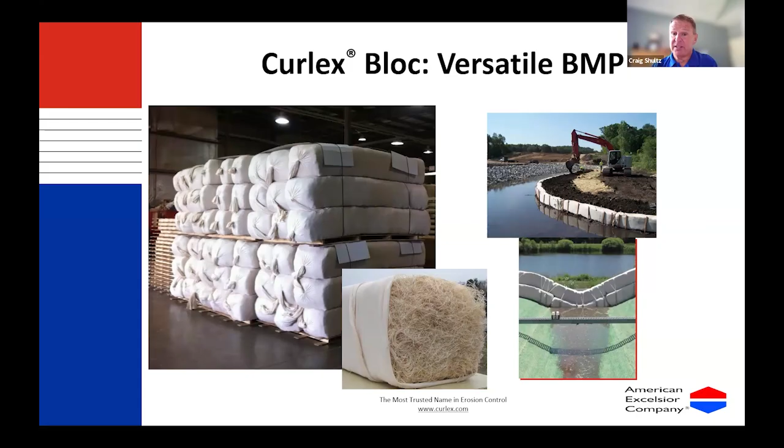What we found is they make great tools for other things—dewatering stations, stream bank restorations. This is an example. Now, I'm talking about streams, ponds, and lakes that have a low fetch, low wave action. I'm not telling you to replace hard armor or riprap, that's not what I'm telling you to do. But if you have areas that are smaller, lower, or a second tier, you can sprig in willows, different things like that. They do a really nice job.

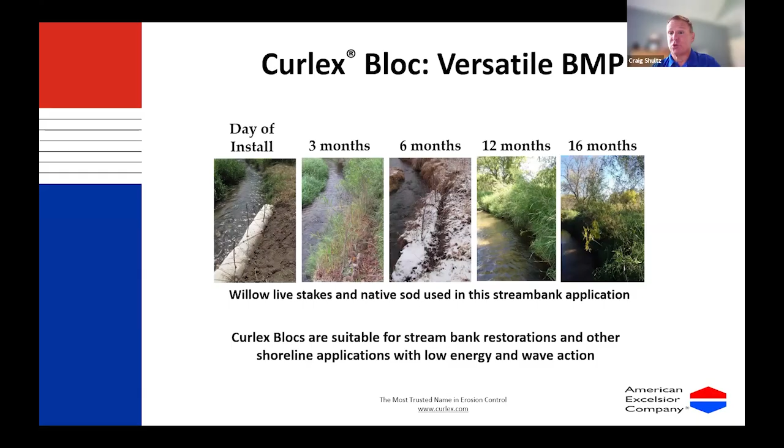Basically, all you're doing is setting these about two-thirds in the water, sitting them on a shelf, anchoring them down with wood stakes and a cotton or sisal rope. You allow Mother Nature to take back over, the roots to reestablish, and then you don't have to remove anything. Just an example of how those can be used.

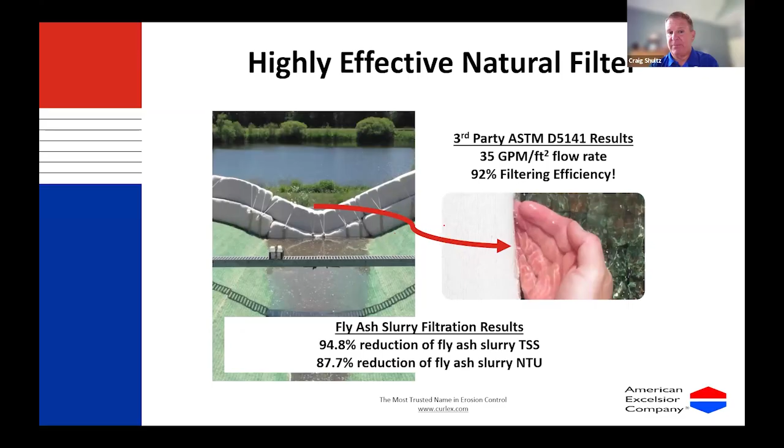I also like to talk about filtering. We did some filtering tests at the ErosionLab with fly ash. If you've ever messed with fly ash, it is nasty stuff. That is really someone's hand on the other side of that block station. With no chemicals, we ran that fly ash slurry down the channel across a Curlex blanket and through a 3-block station and had about a 95% reduction in total suspended solids. So some nice things there.

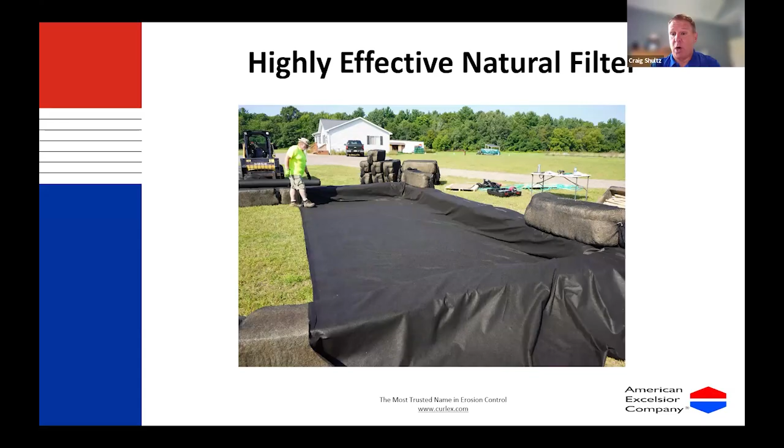They also make really good dewatering stations. We have clients that will sometimes use hay bales and different things. This is something we built at the ErosionLab to replicate one of our customers. They wanted it in a more permanent netting, so that's why they're in this black heavy netting. Basically, they installed one row, put a non-woven, put another row on top, put a third row on the outside. We used T-posts to hold it in.

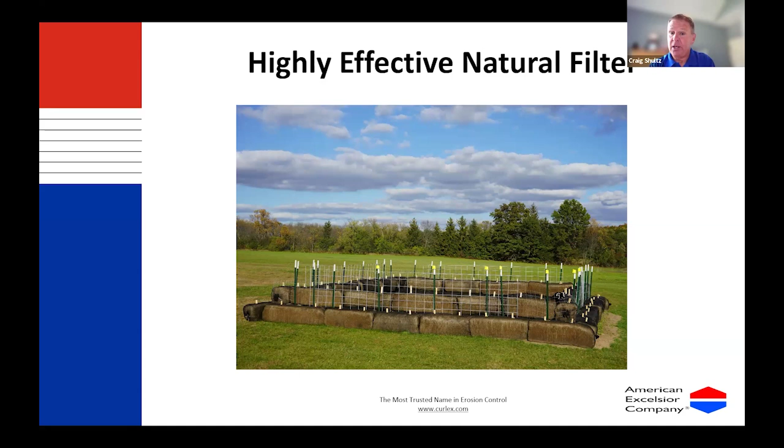It's probably hard to see, but on the bottom right there's a little black snout sticking out there with some white thread—that's a dewatering bag. They pump the sediment-laden water into a dewatering bag. Many of you have probably seen that application. That inside fills up like a swimming pool, and the sediment-laden water has to percolate through those blocks and then out through the other blocks. A really nice way to do filtering without using any chemicals. It may or may not reach your final clarity—you have to have that tested—but it's a nice way to do it with a pretty low cost setup.

And that's it. And to repeat what you said, American made with American made fibers—I think that matters a lot. Now, a lot of people are looking for the Buy American. Yes, we did talk about BABA, so I think everything, or nearly everything we make, will be BABA compliant. I don't know of one that doesn't, but that does come into play for sure.

Well, and I unmuted myself because I took over controls here for the end. But somebody asked you—this is a long-time guest of ours, Chuck Dreesen, who liked the music at the beginning, by the way. Chuck asked, what is the life of the aspen before it becomes ineffective and then part of the soil?

Oh, it's a good question. It's got a really hard answer. It really depends on the environment, obviously. I would say our lightest mass products are generally designed to be functional for 12 months or so, and we go all the way up to over 3 years. So it depends on mass. The half pound a square yard, you're probably closer to a year. When you get up above a pound, pound and a half up in there, we have products that have been used instead of coconut. And again, I'm not bashing on it, but people have called us and said, I need this functional longevity because we're doing natives or whatever, slow growth, and they get protection for up to 3 years or a little more.

Good answer. And I went ahead and typed in the answer in writing, so that'll be captured when we do this on Zoom. And folks, just so you know, as I get to this next one, we're doing perfect on time. Well done, Craig. You deserve your drink of Diet Coke.